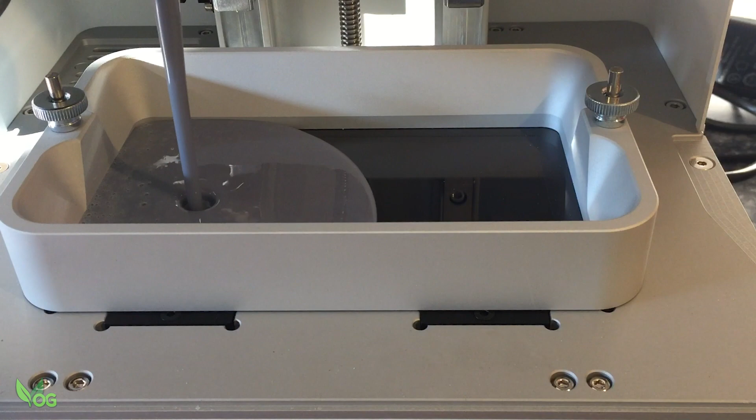I typically use my Phrozen Sonic 4K for these sorts of reviews, and this is no exception. A good number of settings are helpfully provided on the ResinWorks website, and amazingly, the literature says that temperature isn't an issue for this resin. So, even though it was a chilly 12 degrees Celsius in my workshop, I set about printing with confidence.

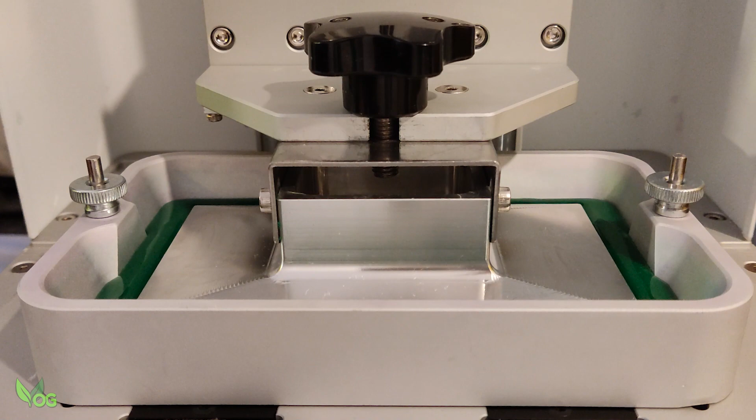The problem was, however, that I couldn't get anything to stick to the build plate. I tried warming the resin to 25 degrees Celsius, just in case temperature was an issue after all, and tried again, several times, adjusting the settings and swearing a lot along the way, but all without success. I eventually reached out to ResinWorks and described the whole situation.

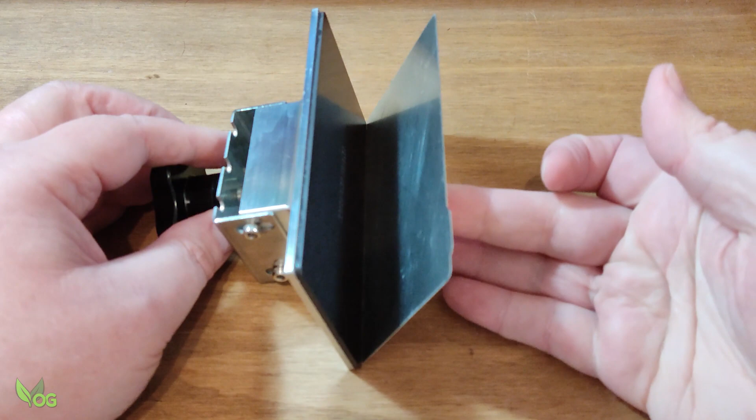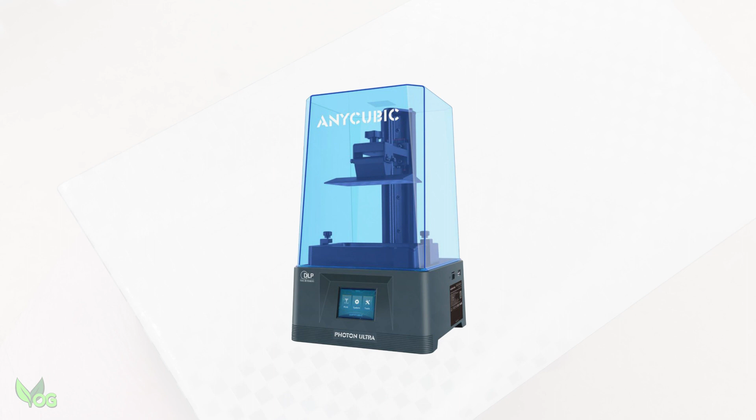Interestingly, they suggested that temperature wasn't the problem, but that the flexible build plate on my Sonic 4K probably was. They suggested a rougher surface might be better. So I opted to change printers, switching to the Anycubic Photon Ultra, which has a checked build plate.

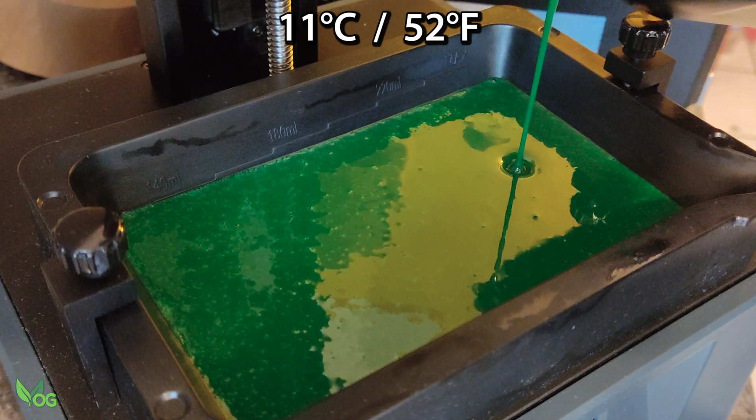Now, ResinWorks is a Canadian brand of resin, and one thing the Canadians know about is cold weather. So I took the plunge and printed with unheated resin, even though the ambient temperature of my workshop was now 11 degrees Celsius. And amazingly, it printed.

I confess this AmeraLabs Town test print has been knocking around in my workshop for several days, so it's got a bit bashed about. But trust me, it originally printed nicely. Certainly well enough for me to move on to something more appropriate.

Once again, I looked at the fabulous work of Printed Obsession on MyMiniFactory and found this amazing Raven ring. I love this piece. It's truly excellent work. Even at 11 degrees, the Ultra had no problem printing 2 of these rings.

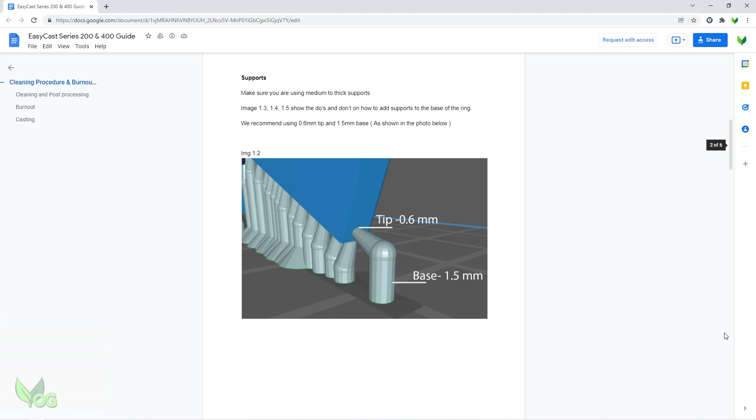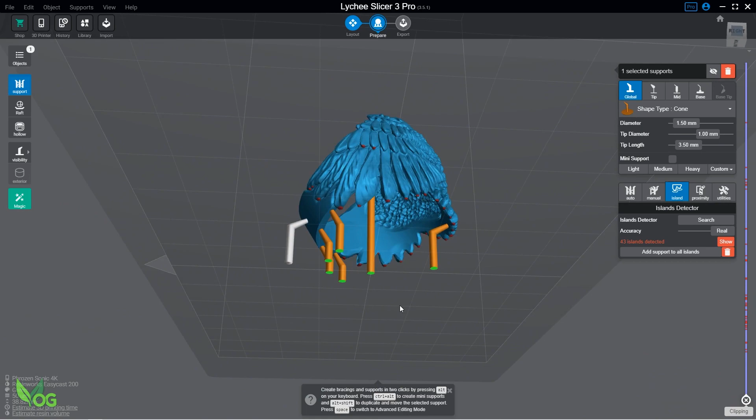But hang on a minute, I'm getting ahead of myself. One drawback of this resin is that it likes thick supports, and plenty of them. This is something we've seen before with resins such as Bluecast X1, and for me it's not a deal breaker. Personally, when I support any print, I always include a number of very heavy supports to anchor the print firmly to the plate and help prevent any possible movement.

And that's what I did here, before adding a massive amount of fine supports. I know, that's a lot of supports, but I rarely get failed prints. And just to be doubly sure, I printed the same print in 2 different configurations. But both came out very nicely.

I expect good things from the Anycubic Ultra, as it's a DLP printer. But these prints were looking very nice.

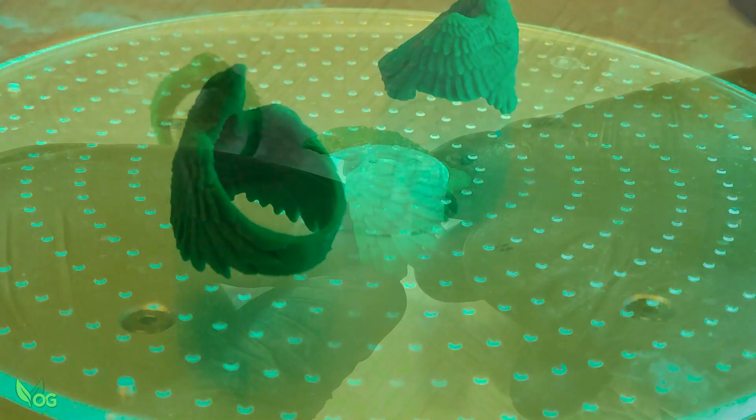I clipped away the supports and gave the prints a generous 4-minute spin in a wash and cure using IPA. They were then air dried before being UV cured for 30 minutes. The resulting print looked excellent. This resin is very comfortable on the eye, and it's easy to see any possible print flaws.

However, the prints are on the fragile side. It seems during clipping I broke away one section of the wing. So gentle handling of this resin is a must.

The prints sand well, and even with 240 grit paper, it's no trouble to sand away the nubs left over from the supports. Then came the nightmare: wax spruing.

What would normally take me 10 minutes took me 2 hours. The sprues just wouldn't stick, and even when they did, the slightest knock and they'd ping right off. I even tried roughing up the area where the sprues would go, but it was a nightmare. So much so that I had a whinge at ResinWorks.

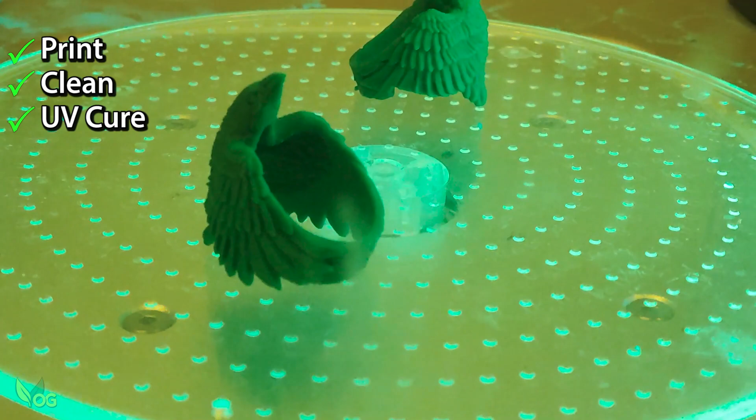Now the fault here is mine, as I should have read the instructions more carefully. So let me clarify these to make life easier for you. Print, clean and UV cure, yes, but doing so can cause oils in the resin to seep to the surface. The solution is simple: an additional 30-second dip in nice clean IPA and an air blast to dry them off.

As proof, here's 2 others I printed to experiment on. I sanded away the nubs as before, but just to be on the safe side, I wiped over the sanded area with a little IPA. I was then able to attach sprues with ease. And look at this.

These sprues are certainly stuck, so don't forget that second wash after curing.

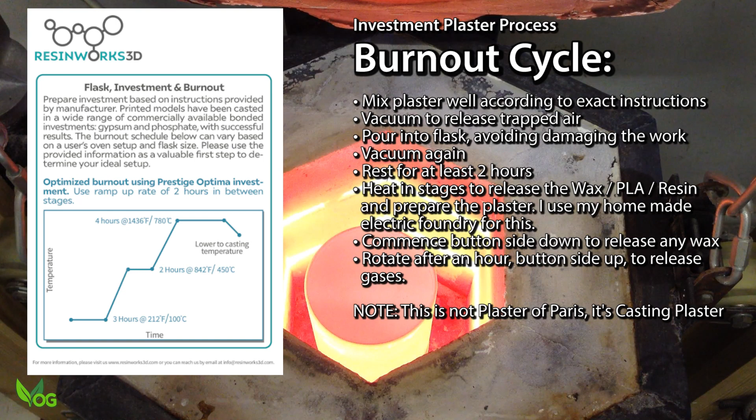The investment process is of course the same as usual. The burnout process is nothing unusual. If it works for wax, it should work for this resin.

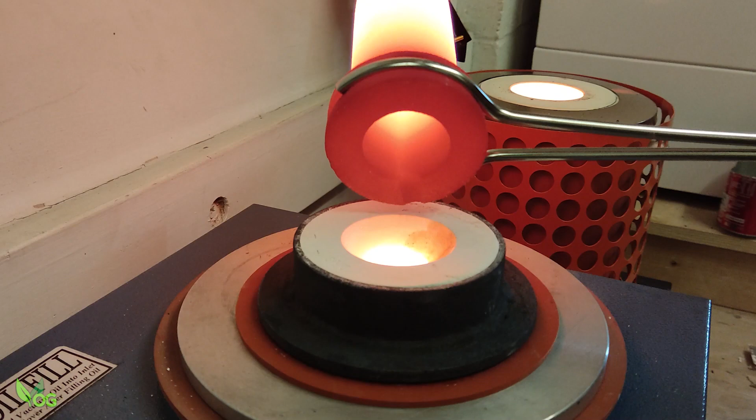And these don't look too bad. In truth, they both looked perfect, so I opted to clean up the one with 2 good wings.

I have to say, I'm very pleased with this casting. It's retained all the details added by the artist Printed Obsession, and it's a nice clean finish.

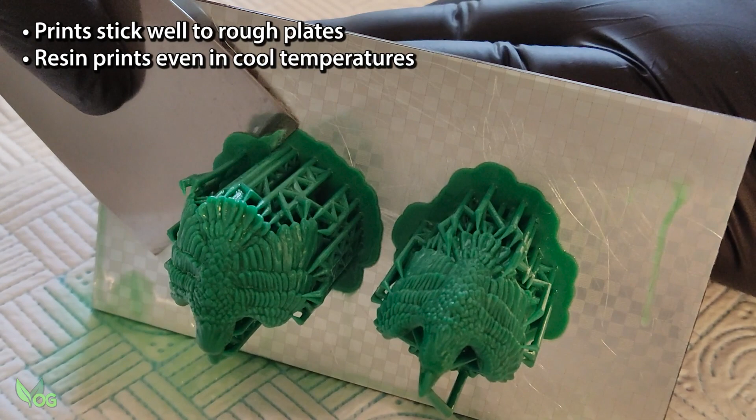So what do I think of ResinWorks EasyCast 200? As long as your build plate isn't silky smooth, prints should stick well without the need for warming, which in my cold workshop is a big bonus. Print supports need to be a little on the thick side, but that fits nicely into my style of printing anyway. There's plenty of detail in the prints and the colour is easy to work with.

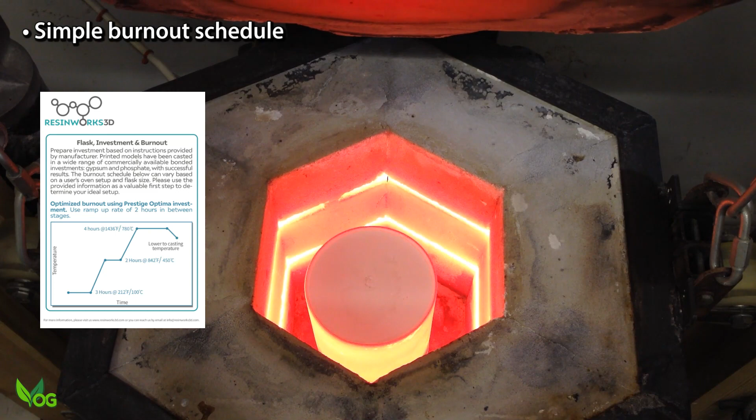However, prints are a little weak, so gentle handling is required to prevent damage. Attaching sprues can be a pain unless you clean briefly after curing, which seems to resolve this issue completely. The burnout schedule is fairly typical for wax, which is a bonus for those sending off prints to casting foundries. And most importantly, of course, this resin casts perfectly.

So this leaves just 2 issues: availability and price. Well, getting this in the US and Canada is very easy. And now, thanks to Pro3DShop.com, getting it in the UK is also a doddle. I'm not entirely sure about Europe, but I do know that Pro3DShop.com is happy enough to ship worldwide.

As for price, it's not the cheapest castable resin I've come across, but it's not the most expensive either. It sits comfortably in the middle, and it provides a reliable alternative to other brands. So, in a nutshell, I like it. It's every bit as easy to work with as ResinWorks claim, and it certainly gets my nod of approval.